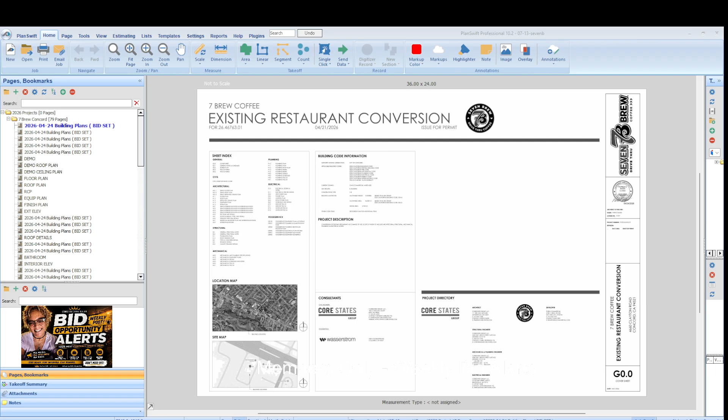And when we talk about tenant improvements, we should always talk about productivity factors and how they apply and how you represent them, so that reduces your need for so many change orders, and you can give a true, honest, accurate bid based on what's actually in the plan. So, in this one, this is a restaurant that is being converted to a coffee house. And so, a lot of good demo.

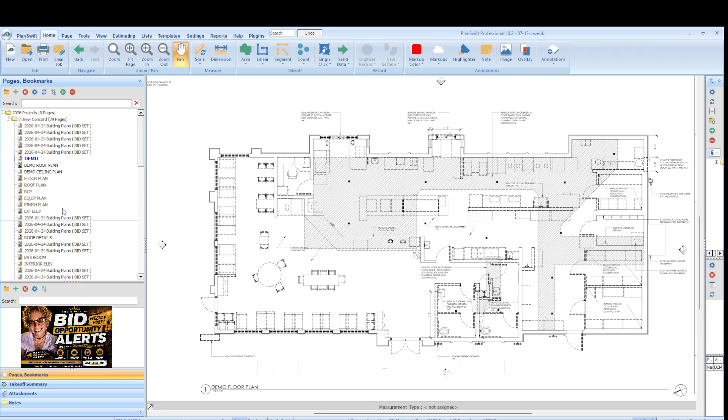So it's a nice little demo where they show you the demo floor plan, but then they also break down the ceiling plan. So basically everything is coming out of the ceiling. All of the acoustical ceiling tiles, all of the light fixtures. So you want to always look in the specifications to see who's handling the demoed items. Does the owner want them back, or do you keep them? It's that kind of thing. So always make sure you have that clear.

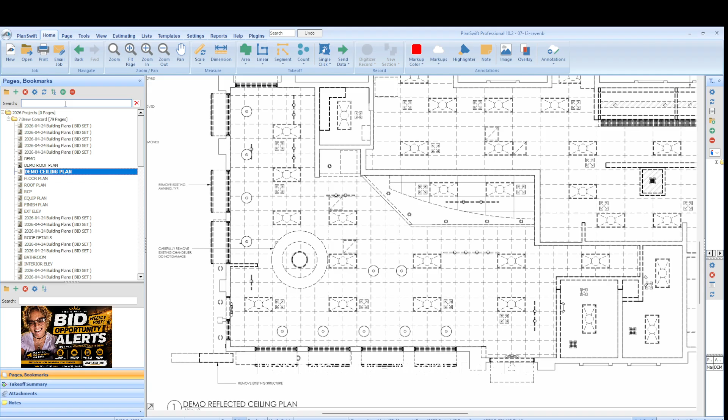So this is a really good demo project. We have the roof plan, a lot of demo going on there. We're installing the whole new roof system. So we have to take off. The roof is like beautiful. This is like demo dream as far as I'm concerned. All right, so reflected ceiling plan, but again, we're going to focus on the MEPs for all of our members.

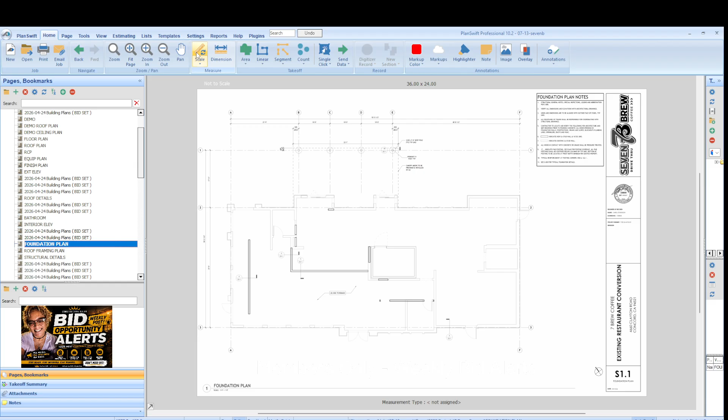So this even has a foundation portion and a huge concrete demo portion. So this is going to be a really good project, regardless of the trade.

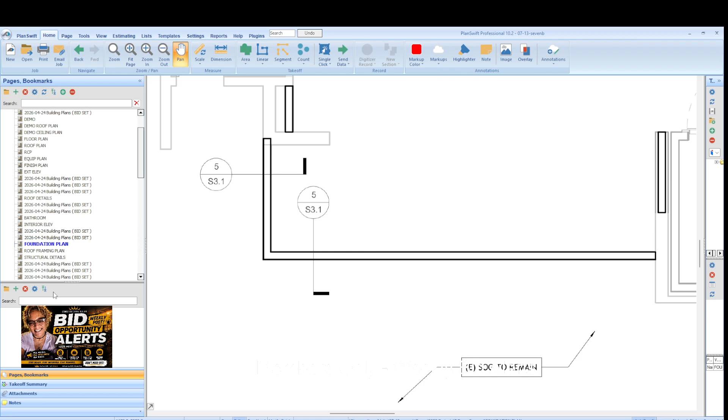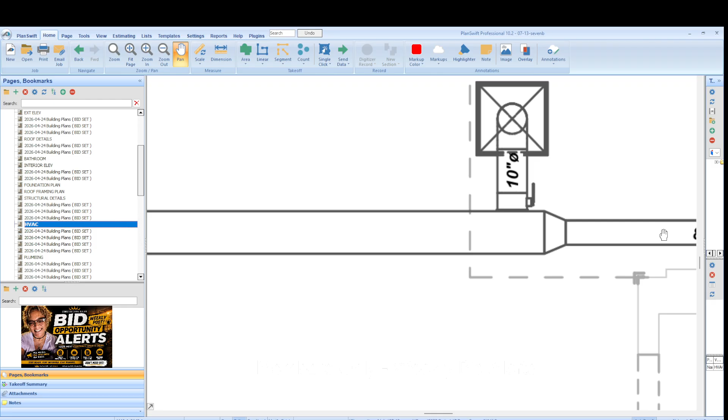So, coffee house, we're going to look at all of the MEPs. So this is a really good one. And so HVAC professional, let's just look at this section right here. So when we look at this, we not only have our straight portion of our 14 by 12 ductwork, we have the reducer from a 14 by 12 to an 8 by 12, and then we have a branch off of the 14 by 12, and then that's most likely a 90.

But again, we need to look at the details for HVAC to see, is that a rigid 90 or is it flex?

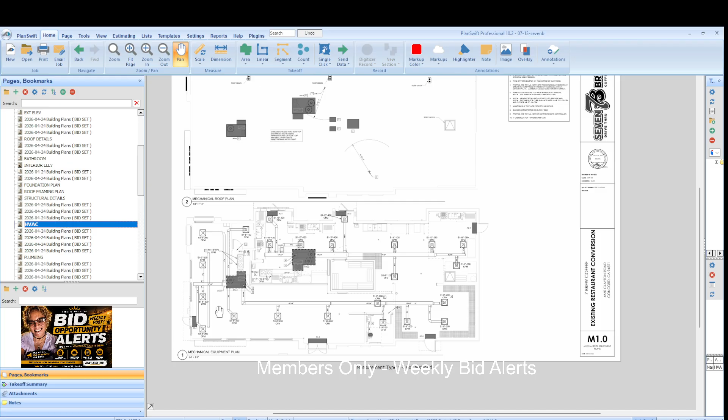Okay, those are all things we have to look into. So if I'm doing the estimating just for this stretch alone, I've got the full stretch, I've got a reducer, I've got two branches. Okay, I have a supply. I'll do that later. That's not even part of the ductwork, but we know we do. But straight runs, I always do. After that, I'll handle any 90s or 45s if they're there. And then the task is the reducers.

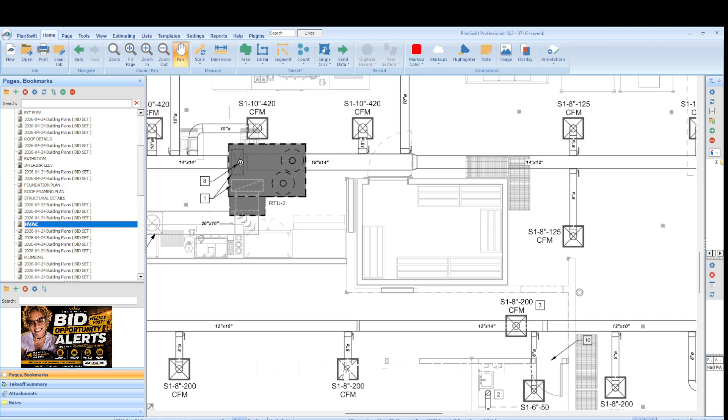Because everywhere you're going to have one, right? A reducer or a branch, that is, okay, that's a spiral. Okay, so that's where you mess up. You get the straight runs, okay, but you got to get the branches, you got to get the reducers, the 90s. Look at the details to determine, do we have a 90 and a flex? That's really important.

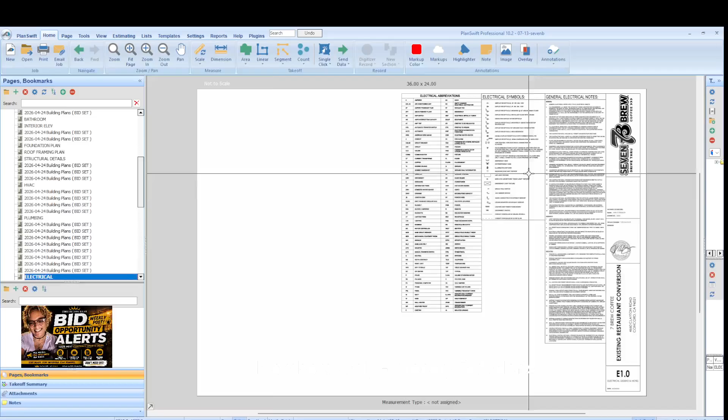Here's the plumbing. Okay. So plumbing, we have the horizontal runs, we have the vertical runs. And what do you do if you don't have a riser diagram? Because you have to determine the vertical runs. Okay. So we'll do that, and our favorite, electrical, and that's going to be a good one. If they're ripping out everything, you see, we even have parking lot electrical in here. Or do we? I don't have my glasses on.

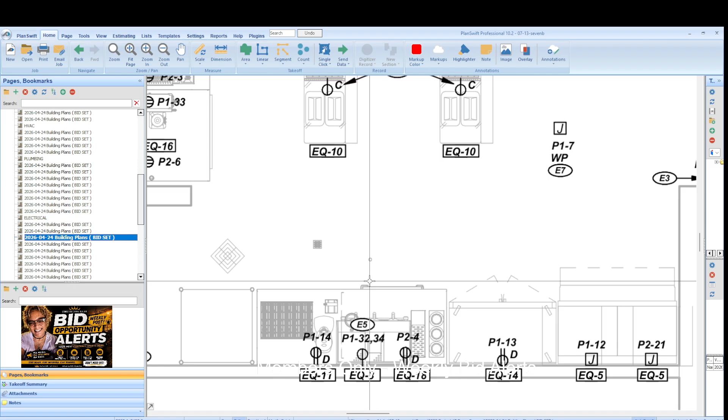Okay, yeah. I knew we did. All right, so power. We got to run that, and it becomes crazy land if you don't have a methodical way of, where do I start running the conduit? Because this is a scaled set of plans. Okay, which means if I measure 10 feet, it should be 10 feet. Same thing with my home runs. Okay, now I know that

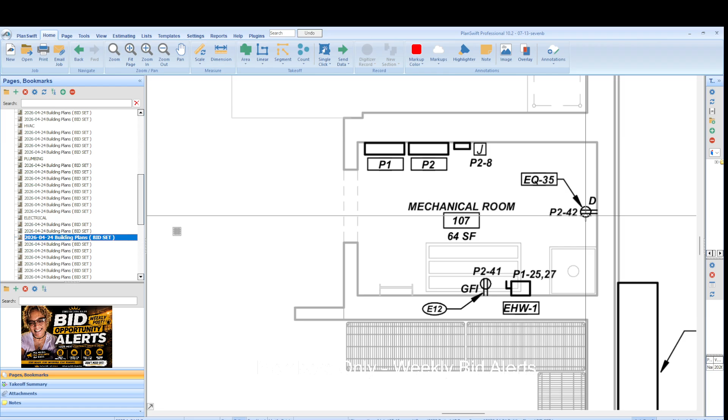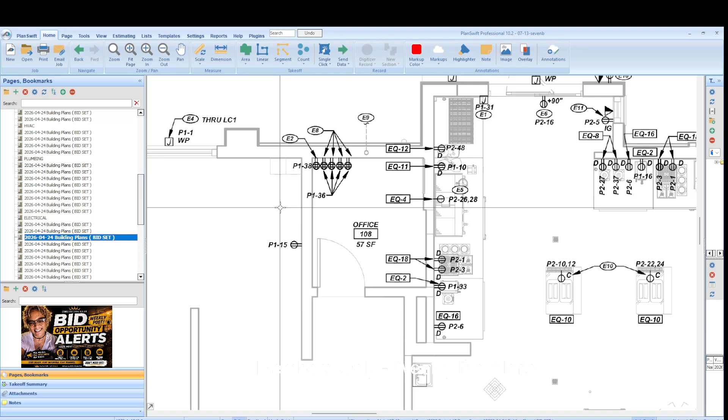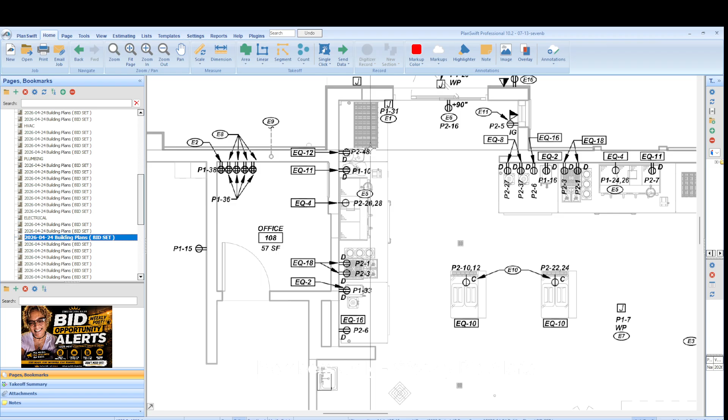So, but you got to check. You might have a P115 way over here. So you got to make sure. Yep, right here. See, right? They got them everywhere because they can. It's like a general purpose, right? The general purpose outlets, they can just do their thing. So you got to look for that first. Which ones run together? When you know you've connected all the ones run together. Let's see, anything here run together? Nope. See, and that's when it's going to be crazy land.

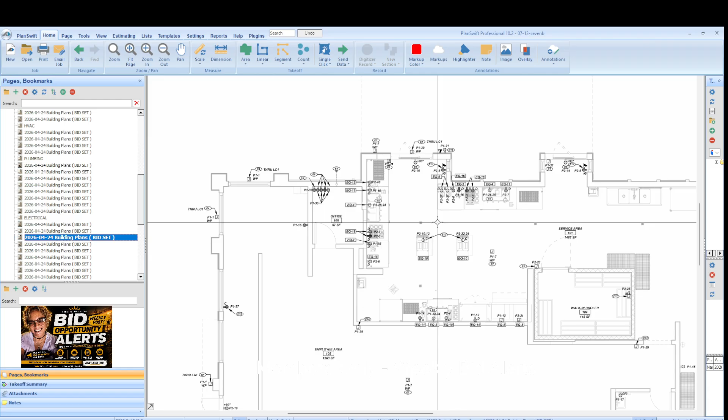We don't have a 31. No, no, no. Okay. Yeah, it's going to be crazy land, because what does this mean? Well, it means each individual one is running to that position in the panel. And so where do you start? You'll see my rule of thumb so you don't go to crazy land trying to look through all of the runs that you've put on here already.